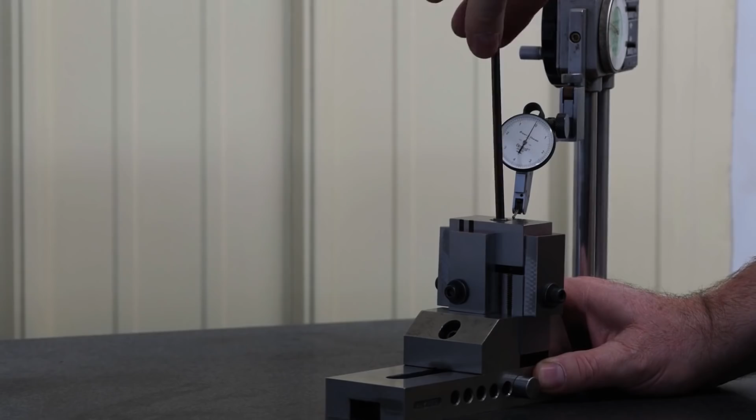Hello everyone. In this video I want to answer a lot of the questions that we've got from the previous video, and then talk about the visit we had with Uncle Murphy, who decided to bring his favorite cousin Bozo along. We'll discuss that a little bit as well.

There's been many questions asked in relation to the last video we did on this custom boring bar we're making for Keith Rucker. One of the main questions people are asking is, why aren't you using steel instead of carbide? Well, there's a couple answers for that.

One, we happen to have a piece of a broken carbide boring bar laying around, and Adam was kind enough to donate that. It would have probably just sat around, whether we would ever use it or not, I don't know.

But the more important reason we went with carbide was because on a steel boring bar or threading bar, the amount you can stick that bar out without problems is only about half of what you can with carbide. Now here are some of the boring bars that we make and sell right here.

This is a 3/8 bar, and this is a half-inch bar. These are made out of steel. With the steel bar, this being a half-inch diameter, the general rule is I can get about 4 times the stick out. So if I got a half-inch bar, I can get this sticking out about 2 inches, cutting in soft steel without too much problems.

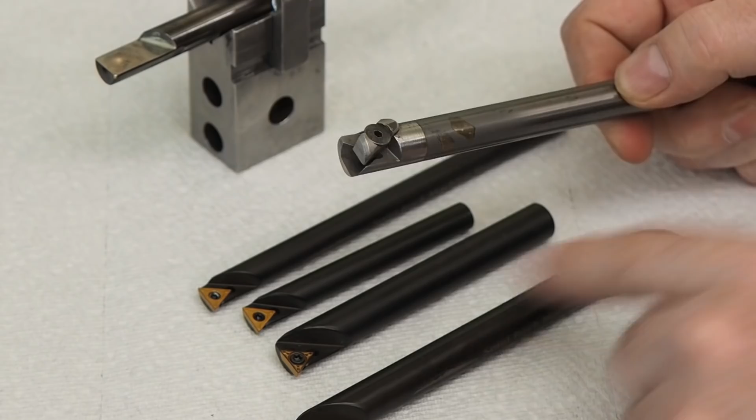So for getting the rigidity for the cut, we wanted to use carbide, because I've got to grind this diameter down to 450 thousandths. The nut that Keith has to make is 2.5 inches long, so we decided the bar, from the tip to the shoulder and the stick out he's going to have, would be 2.8 inches.

For a steel bar, that would surpass the 1.5 inch stick out you'd have with a 3/8 bar, and with a half-inch bar at 450 thousandths, a steel bar would also be surpassing it. But if it was carbide, it'd be well within that.

Plus, with a regular boring bar you're cutting with just a small tip. When you're cutting with that threading insert we have, there's a whole lot more surface that's cutting. So this is the main reason why we went with a carbide bar rather than a steel bar.

A lot of people are asking, why didn't you just take your carbide and silver solder, braze, or whatever, another piece of carbide on the end and shape it? Wouldn't that be a lot easier? Yeah, maybe - there's all kinds of ways.

People are talking about burning a slot, or actually cutting a slot in there. Well, I only have 2 diamond wheels, and there's no way I can get a slot in there. I do have some friends with wire burners, and that would actually be a good wire burn job. If you had the slot, I think that would work really good, and that'd probably be the strongest in the end, because you can have the bottom and the top.

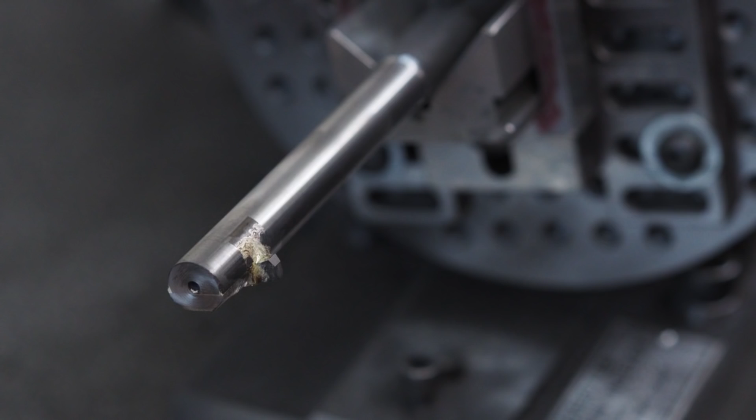That was my first mistake. What happened was when I had the tip silver soldered in there, and I pulled it out right now, Kathy will show a picture of that. I was going to grind relief on the heel side, on the relief side of the insert, and I wasn't paying attention, and I ground the cutting edge side, so I scrapped out that first insert.

As I did that, I'm looking at it and thinking something's not right. At my full-time job, I do use the lay-down inserts, but I haven't used them in a while, and we've been cutting threads — I think 10 thread per inch is about the coarsest we cut. Then we got 12, and we got inserts designed for that, and we never have a problem. I just slap the insert in and start cutting. I was thinking I'd have the same thing with all the geometry on this insert — that I could just silver solder it on there and take off cutting. And boy, was I wrong.

A couple of our YouTube subscribers pointed this out to me, and we'll talk about that in a minute.

But anyhow, what I have to do right now is get this from this flat. I have to cut this pocket, this meat over here. I got to cut at that 15 degrees, and with my 30 there, so we're running a compound angle.

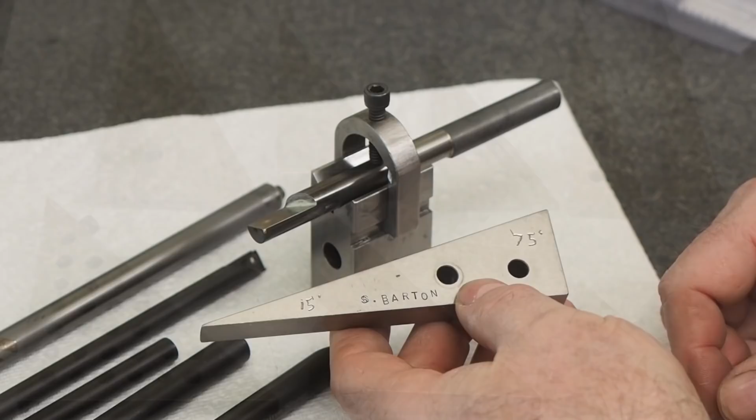That's where a lot of you people see the templates that I have. I brought a bunch of them home from work, and Kathy's going to show you a still picture. I can't have enough of these either — there's a lot of common angles that I use and work in.

So here's a 75 degree, here's 15 degree, here's 90 degree. It works out just right that these lay-down tools, at least the ones I use, have a 15 degree angle relief. So I'll set this up like so on some blocks, and then I'll be able to rotate that flat, and now I've got a real nice 15 degree established. It comes in good and handy for doing things like that, so when I grind that angle, it'll be good.

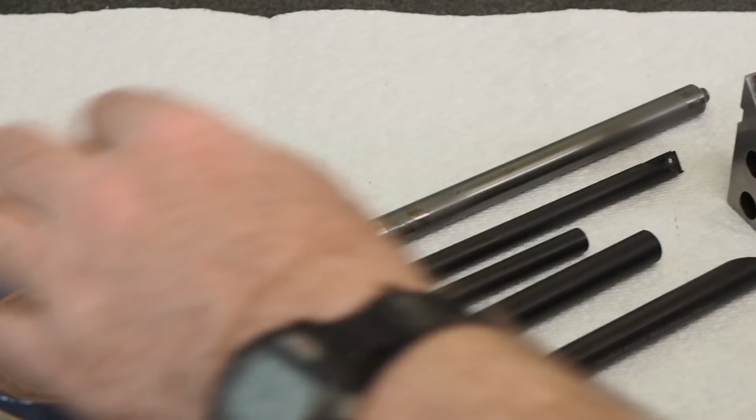There's a bigger problem that we have with grinding the relief for the helix, and I'll get to that in a minute. But the other issue I wanted to talk about was the silver solder — let me move some of this stuff around.

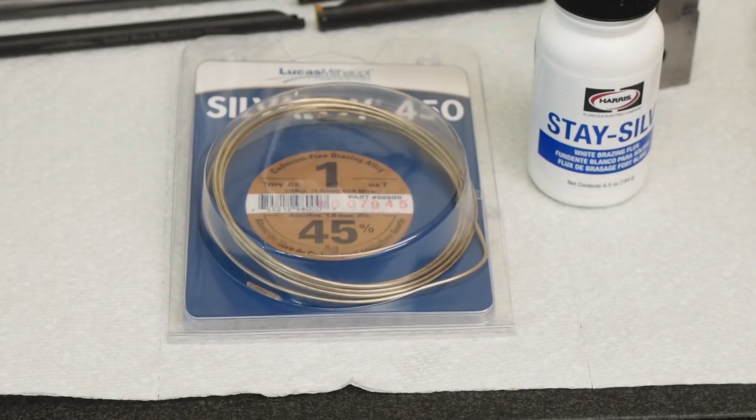And the flux that you use — there's a lot of controversy, you'll see it all over the internet. All my life I've been calling this silver solder, and even today, looking at the controversies and some of the comments made, I'm not sure if this is still considered silver solder or not. There seem to be a lot of differing opinions. All I know is this is the stuff I use.

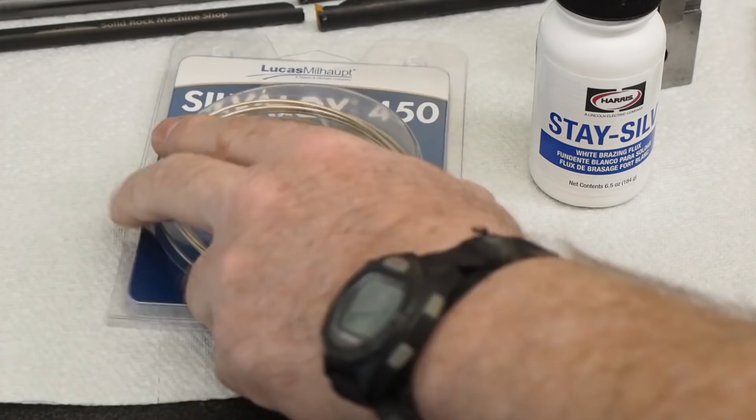Between the two pieces of carbide, that joint is really strong. Now what you've got to do is match — whether this is silver solder or silver braze, you have to match that with the flux you use. And the way you do that, if you come to the back side over here, it'll talk about this.

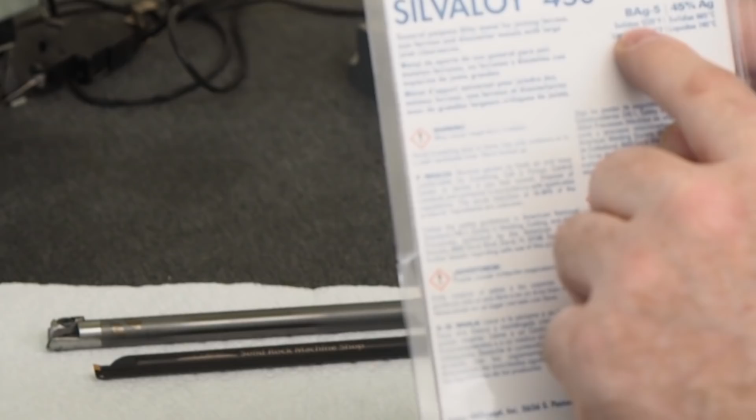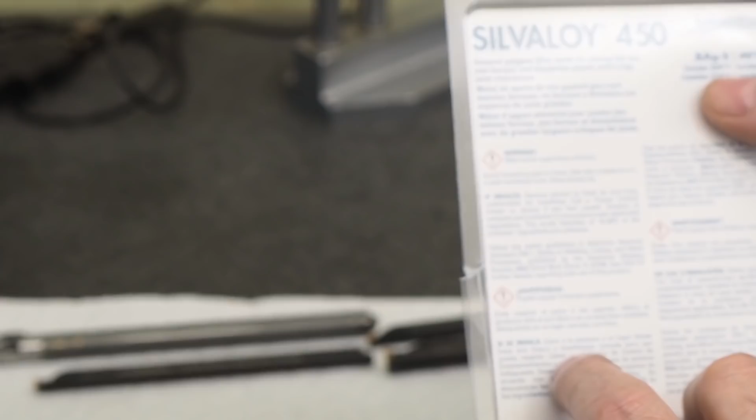Okay, it's at 1225 degrees — that's the temperature, I believe, the melting point of the silver solder. It becomes liquid at 1370. So it's much higher than the old soft silver solder or soft soldering that you probably generally use.

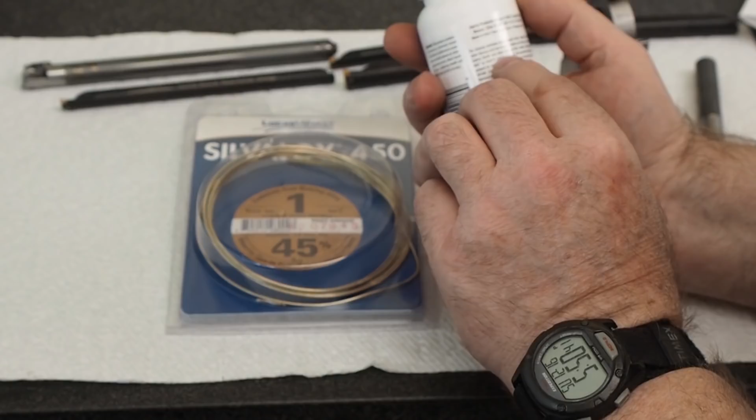So if I get some flux, I need to look over here, and I can read on the back it says it's chemically active from 1100 degrees to 1600 degrees Fahrenheit. So that's within the range here.

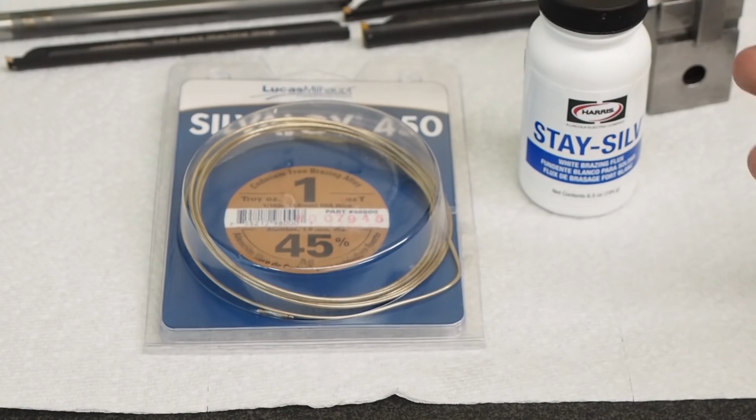That's within the range of the melting point there, and that's how you want to pick your flux. Now, one of the most common things I've seen on the internet is that if your melting point is above 800 degrees, they call it silver brazing. If it's below, they call it silver soldering at that point. I'm getting confused on that too, but there's a lot of controversy. The important part is that your flux matches what you use.

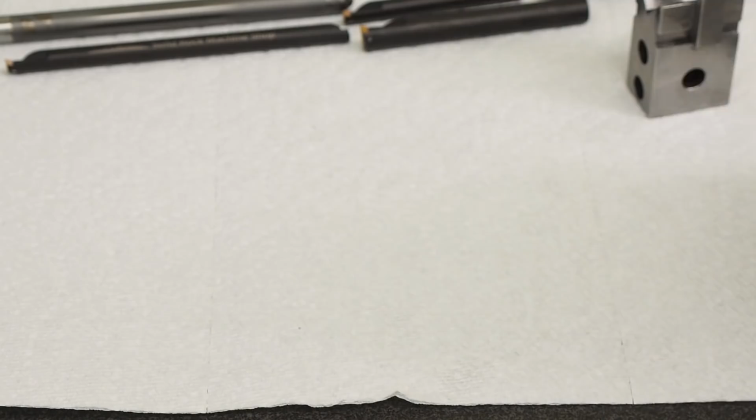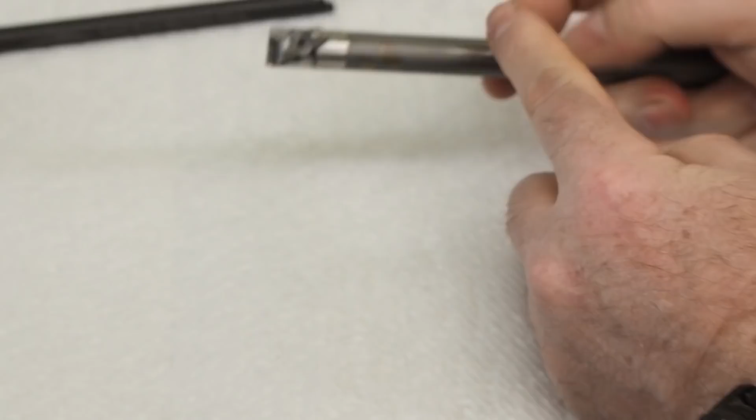This is what I use, and like I showed you, I've made these carbide boring bars. The reason I'm reluctant to make these - one thing I can do is cut the tips off and make a screw-on insert to go in there. I may do some bars for myself, but I'm reluctant to sell them because, one, the carbide's extremely expensive, and two, if you're in a small diameter hole cutting steel, you'll get a bird's nest in there, and a lot of times you won't even hear it. You're going in the hole, and all of a sudden you pull it out and the whole head is gone.

It's a bird's nest, and it puts so much pressure that it cracks it off. If you have a good silver solder joint - that's what I'm going to call this, not knowing if it's the correct term, but that's what I've called it all my life - here's one of those boring bar heads, 5/8 diameter. If you've got a good joint, you can see this entire carbide broke off and cracked down the side. It's still stuck and holding real good in there. It's very strong.

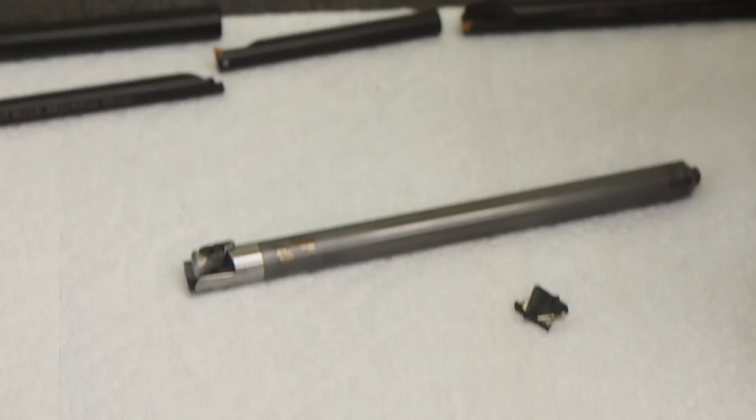Here's what I did with that silver solder: because when it's round it tends to roll, I'll heat this wire up and close it in the vise to flatten it out a little bit. Then you don't need a whole lot of it - you just take a cutter like this and clip off a little bit, put your flux on the carbide on both sides, and put that little tiny piece of silver solder in between. You heat it up with the torch, and when it gets to the melting point, it spreads out like liquid.

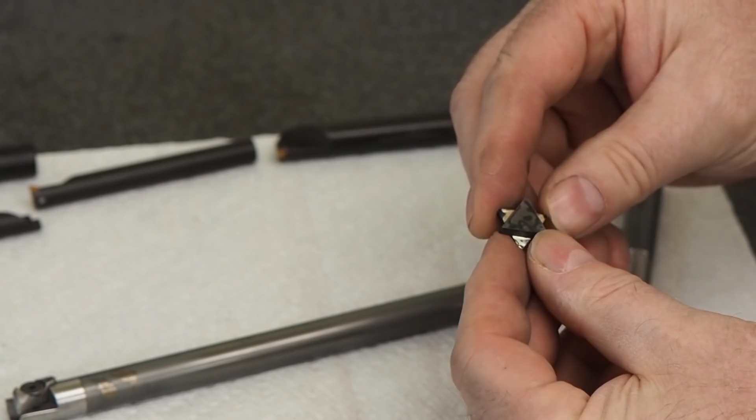It's funny, these are two used carbide inserts I was just practicing on, and I set them like that to begin with, but as soon as the silver solder melted, they would turn and line up to get all the surfaces together. It was almost like it was magnetic, so I had to get a screwdriver and hold it, turning it sideways to get it to stay in that pattern. I don't know if I can find a way to test this joint's strength, but maybe I'll figure something out. I bet that carbide would break before that joint would break.

So anyways, that's some of the comment section controversy over whether this is really silver solder, silver braze, or whatever. I don't know what the correct term is. All I know is this is what I use and this is what works. The important thing is just getting your flux and your filler material in the same temperature range.

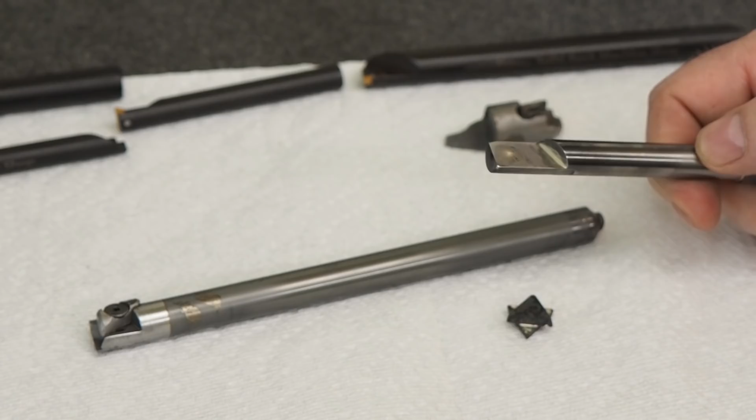The biggest issue that would have really been a mess is I didn't factor in the helix angle of the thread. It's a 4 thread per inch, and that's a very coarse thread - about the coarsest I've worked with is 10. We had two guys that helped me out with this: Lunky Dog, one of our subscribers, and Russ Kepler.

So I'm really appreciative of that.

So what I'm going to do is bring you over to the computer on Fusion 360, and I'm going to show you some of the details of this helix angle and the relief that has to be ground in the insert as a result.

Okay, this is just a rough drawing and rough concept. When it comes to Fusion 360, I love it, but doing some of this helical stuff and fancy drawing is kind of hard, a little beyond my experience. So basically what I did is I drew this. 875 is going to be our big diameter, 625 will be our small diameter.

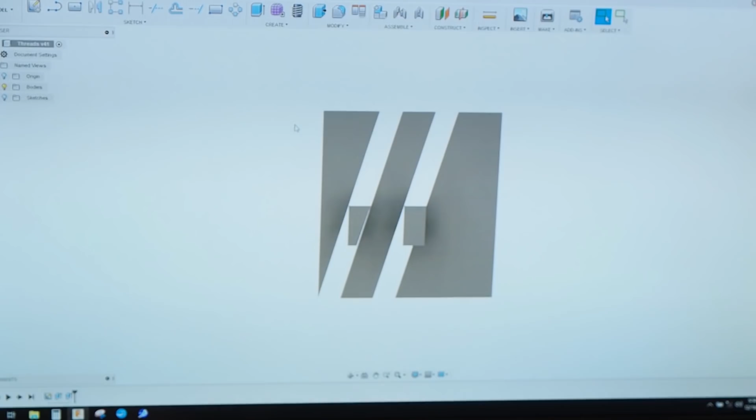So here's the insert unaltered. From here to here a quarter inch, from here to here a quarter inch. So we got a 4 thread per inch helix going on over here. And at 875 with a 4 thread per inch, we have an angle established right here.

If I use just a square tip, now the tip there had some angles, but I think it was very slight, I'd be surprised if it was more than 4 or 5 degrees. But anyhow, what would happen is if I tried to cut this without altering that insert, you can see there's a lot of interference right in this area. I would be rubbing with this non-cutting edge, and I would just break the tip off before we got in there. And if I could rub that off, the thread's not going to be even close.

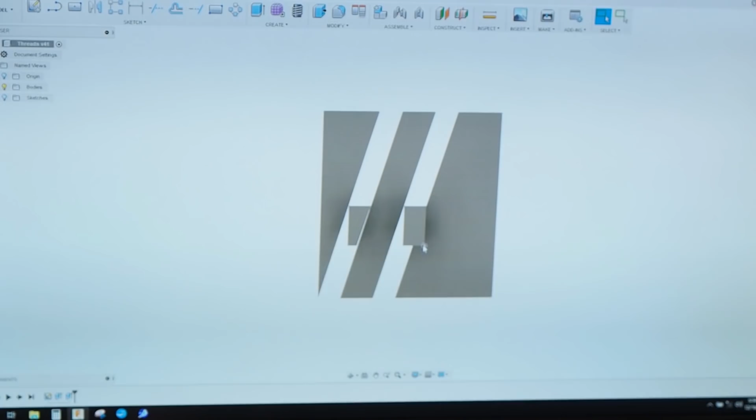So in this case, I would have to alter this relief on that tip like so. But you got to remember, this is at the big diameter, this is 875. If I drop down to where this is 5/8, and we have a quarter inch on those areas so that we have our thread per inch, look at how much more material's got to come out. Look at how much more interference. The angle has increased big time. And so the smaller I go, the more relief I have to have.

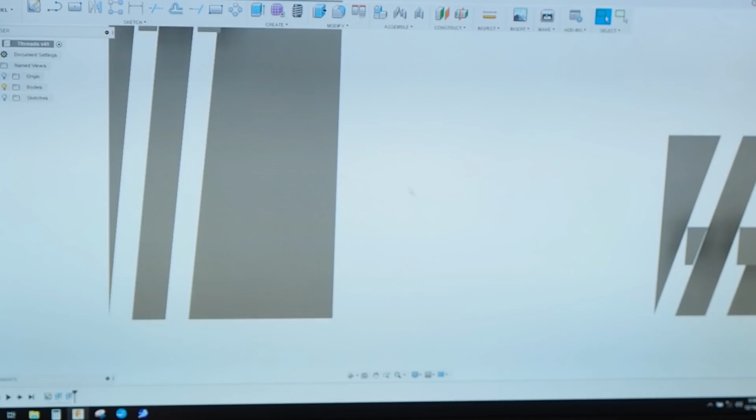And if I come back over here, I just drew one at 3 inches, where this is at 3 inches, and we have a quarter inch from here to here. And you can see the difference in the angle, very slight compared to that, and definitely very slight compared to that. So the smaller the diameter you go, the greater this helix angle becomes.

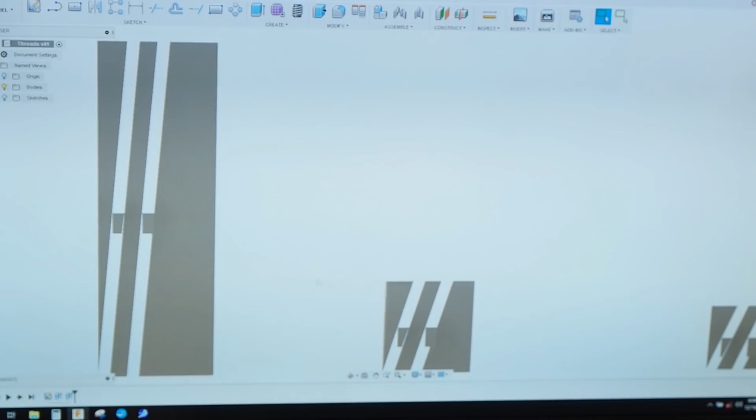And so that's why I believe this insert that we bought, one reason why the smallest one I can find was a 1/2 inch IC. Those are made for doing some large diameter work. And I'm going to just go in here and edit on the sketch so I can show you the actual dimensions so you can see.

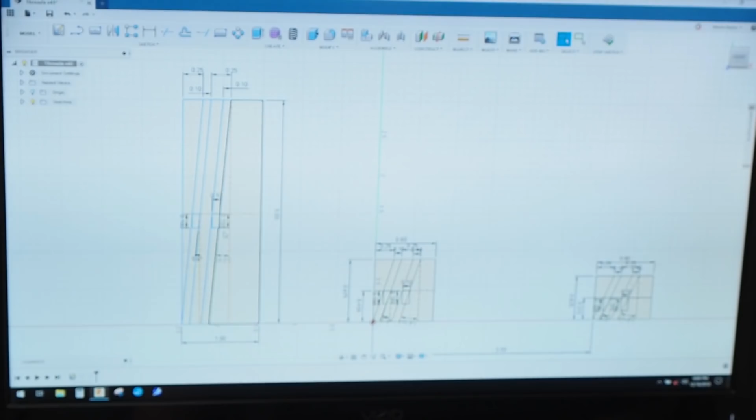So you can see I got from this tip to that tip a quarter inch. I got 100 thousandths in between. I got 3/16 on the tip. But look at a 3-inch diameter that you have, my clearance on this angle coming from this construction line, so this angle right here is 4.8 degrees. I'd have to go probably at least 5.8 degrees in my relief area, and that's if I'm doing a 3-inch.

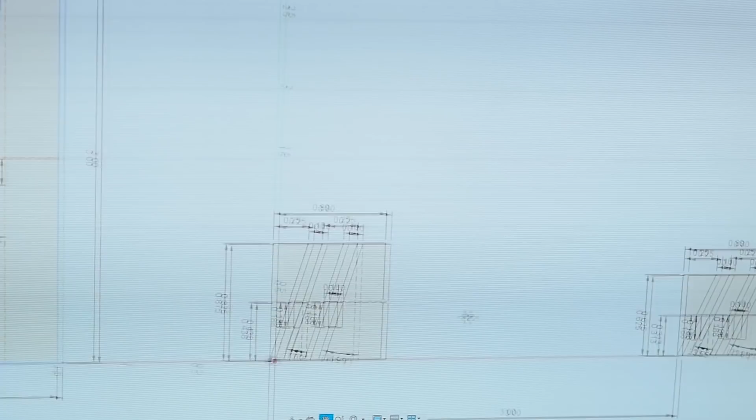If I come down over here and do the 875, well, look at how much. I went from 4.8 degrees to 15.9 is what I went to. I'd have to have about a 17-degree relief.

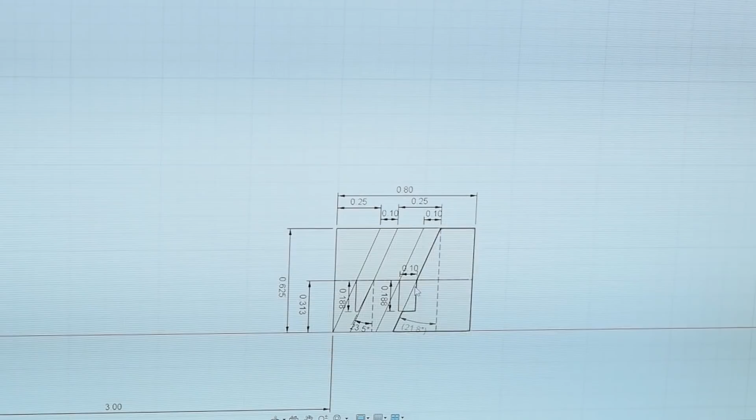When I come over here to the 5/8, look at how this angle has increased. Now it went from about 16 to almost 22, and I'm going to have to grind a relief angle in here, probably at least 23.5, so that I have no interference in there, and that it can cut through that.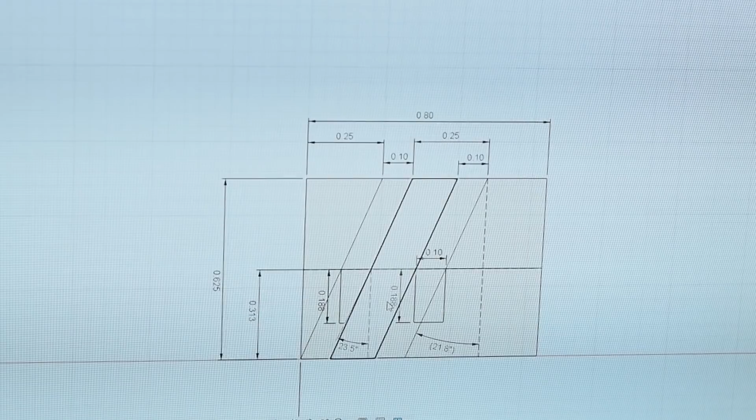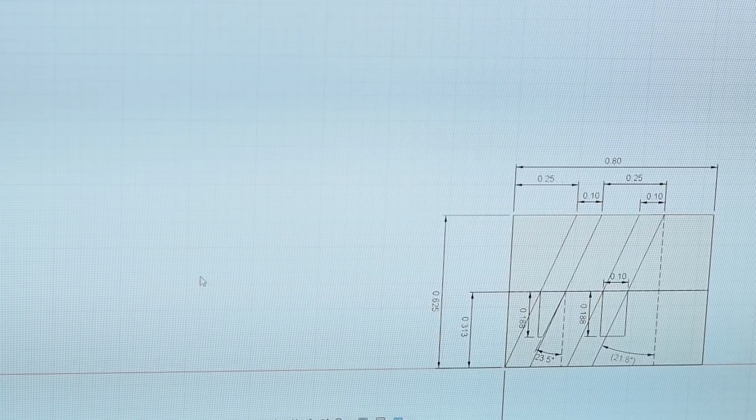And by the time you do that, you can see that this insert becomes weak. This area right here, if I remember right, was about 20 thousandths of an inch. You can see here the material that would have to be removed just to match that line. And so what happens is now we're going to have to remove that material at a compound angle.

So the difficulty of this job has just increased a lot, and we're going to have to get into some complex compound angle grinding just to show you what we're in for.

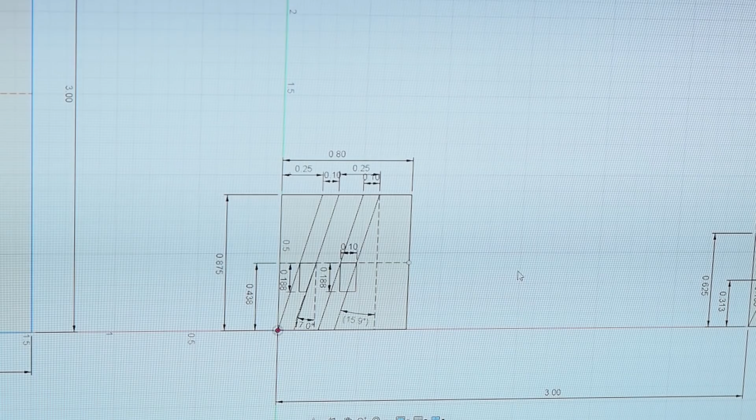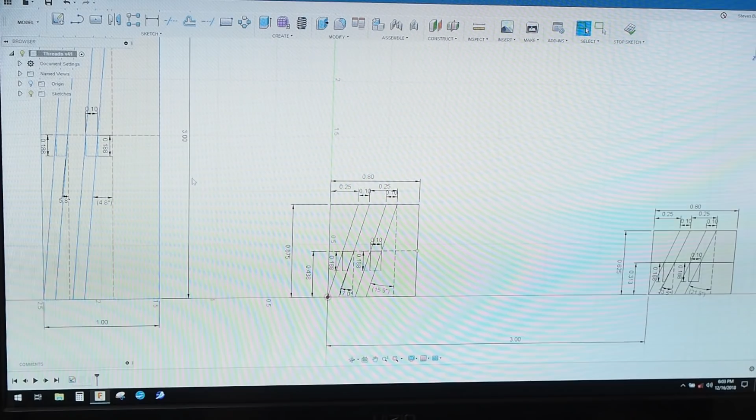In my history with the laydown inserts, all the geometry's correct, and you just pop it in there, you don't have to do anything else. But 10 threads per inch was the smallest I would have to go, and I've never had a problem. If my diameter was big enough, I could probably do the same with this Acme threading insert.

Now, the nice thing about it, because you got the relief angle over here, this is what I got to cut out and make relief for. But on this other side, I don't have to worry about it. That can be straight up and down. I don't need to worry about that material there, because this is all clearance already for it.

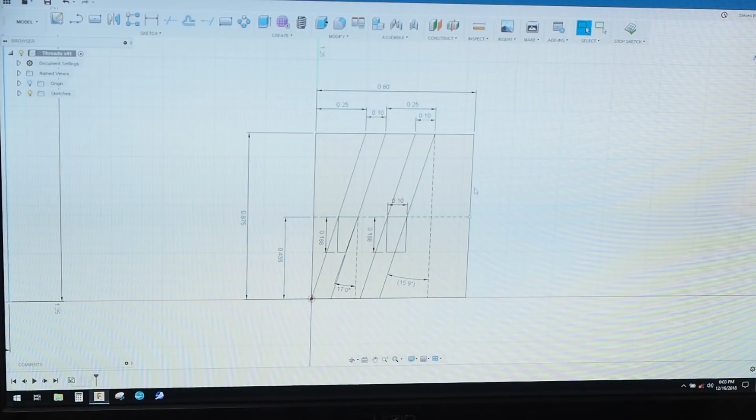One of the other questions I was asked was, well, why don't you do it a different way? There were many suggestions, many good, valid suggestions on why I would do it this way. One, I got into this thinking that with the design of the insert tip, I wouldn't have to mess with the geometry, and I was wrong on that.

But now my curiosity's got the better part of me. I need to go this direction just to see if I can do it and make it work. If I can't make it work, then I can turn around and we can explore some of the other alternatives. But I'm kind of built that way.

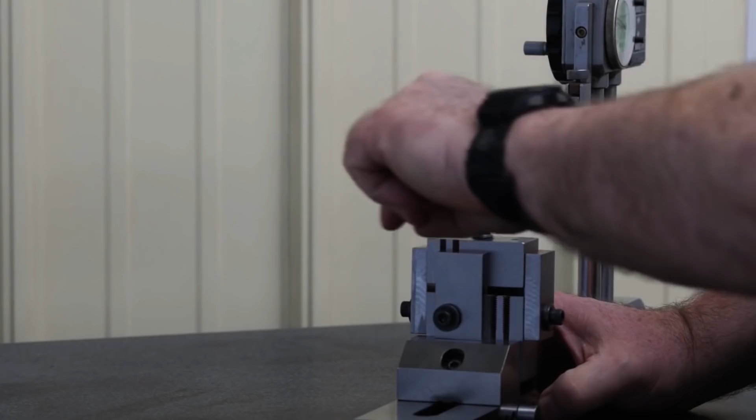There's a lot of things I want to see how they work, and we're going to show you some footage, some previous videos where I'm exploring some design concepts. Like when I saw Tom Lipton do a video on differential screws, I had never even heard of them, and I found that very fascinating. So I started making some of these differential screws and an adjusting instrument, so that I could get a very fine resolution adjustment.

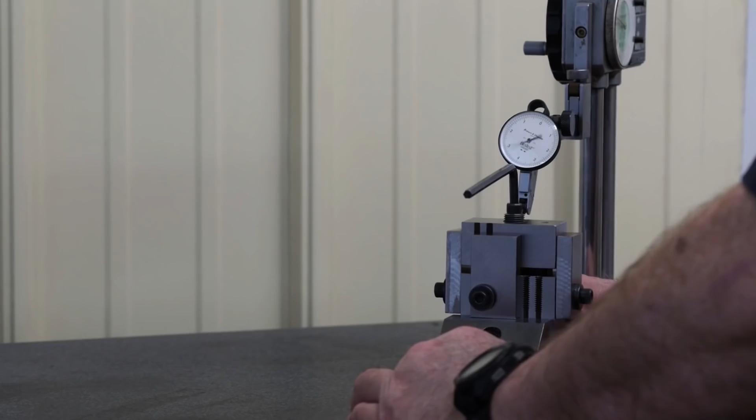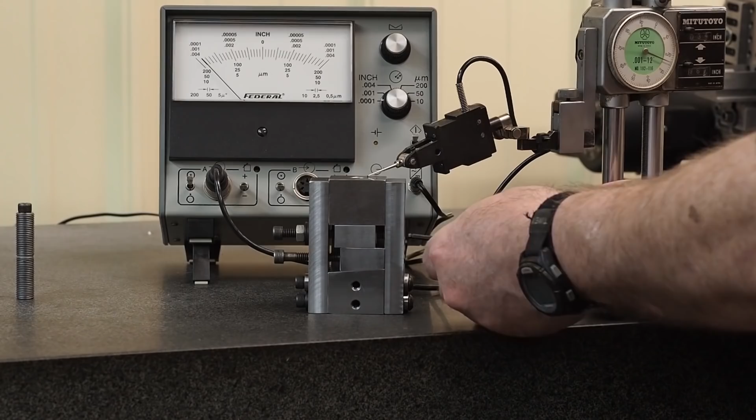In the meantime, I thought, hey, I could do another type of adjustment to get fine adjustment, a wedge adjustment. I don't know if they sell them, this is just something I thought would work, so I'd try it anyhow. I did not have any immediate use for it. I thought I would, but I shifted gears after talking with another YouTube friend.

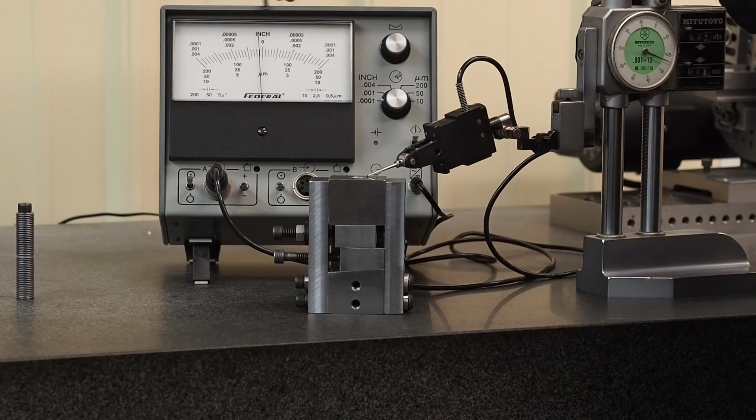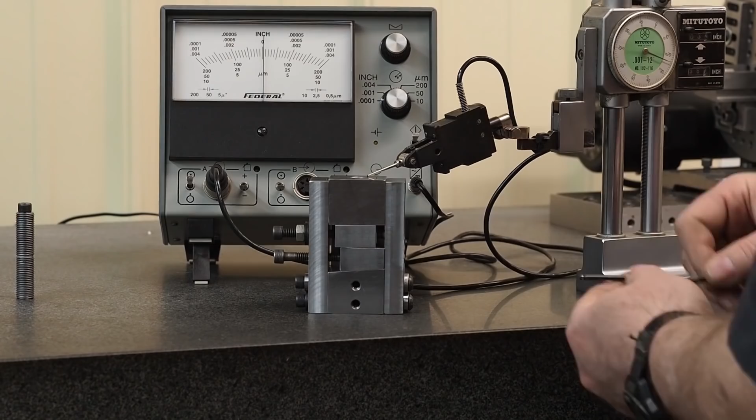I guess what I'm trying to say, I'm going to show you some footage. I make things sometimes without a direct purpose, just so I can learn from them. With that fine adjustment, the one with the wedge, I got the fine adjustment where I can take a 1/4 screw just off the shelf and use that as a push-pull mechanism for this wedge. The resolution I could achieve with that was beyond what my amp could even measure.

My amp, the finest resolution per mark, is 5 millionths of an inch. So we're going to show you some footage on that, because it's kind of buried in another video, and I think a lot of people haven't seen it. This thing is really neat. But I'm going to show you this footage because it shows you what kind of drives me.

Now I need to know. I know curiosity killed the cat, and sometimes that's a bad thing, but that's one of the things that drives me. I just need to know. So all the valid options you guys have suggested for doing this, we'll probably visit one of those if this doesn't work. But for now, I got to just try this, just see if it works. And that may be a big total failure, and it may be a success.

I don't know. The one thing is, it's not with Keith. We're doing this for him, so it's not like he's paying for it and he's going to come out at a loss on this. Any of the loss will be on me. But regardless, at this point, this is the direction I'll be going, just so I can see if it's possible and if it'll work.

By doing all these compound angles and the grinding and the relief of it, it's going to be a challenge as well as a learning experience. Maybe it'd be something that a lot of you guys can find a little bit of value in too. I know these are kind of things that help me with future projects, because I can use some of these concepts.

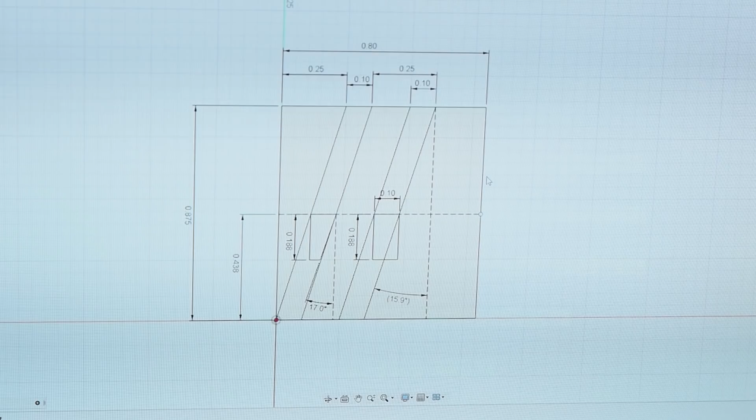Okay, this is the bottom of the bar. I got the flat on this side, and I already set my insert because it's going to have to be sticking out — the tip of it is going to have to be sticking out this way. So just for reference, I drew a blue line with the direction I got to set this up, so I have a good reference and don't grind the angle on backwards.

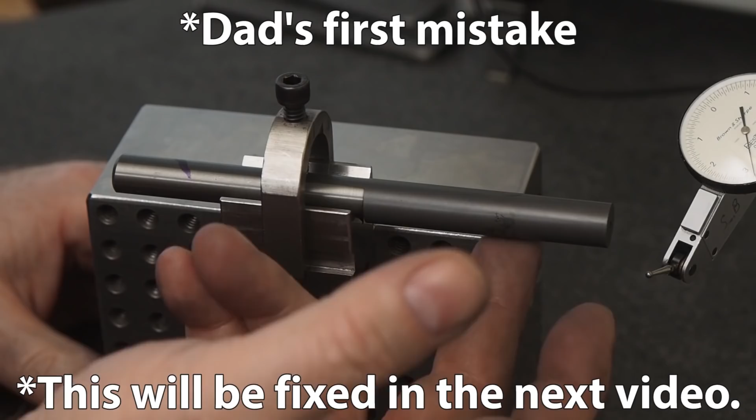But anyways, we got this flat, and I'm going to indicate this flat in. That way when Keith sets up, it'll be easy because this flat will be running parallel with this little notch we're cutting in here, so it gives them a nice reference source to work with.

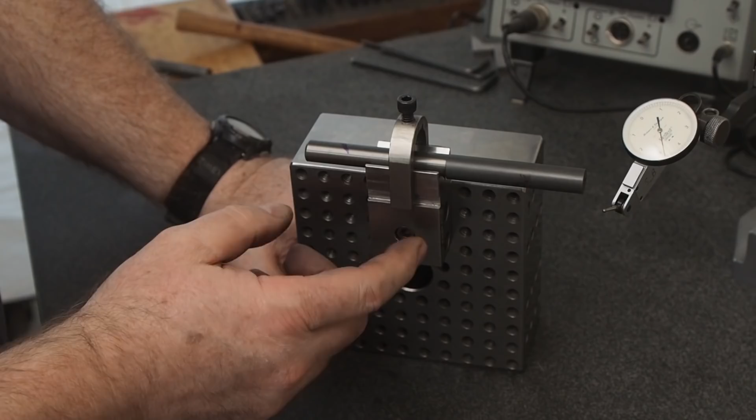Now, one of the nice things about these squaring blocks and your other tools — I always make my tools in the future with the idea that I'll probably be attaching a block over here. Here's how it's going to make some of this stuff easy. Because I have a flat going up here, I can take my 90-degree square and hold that up against this pin, loosen this up, get that oriented, and then snug that down a little bit, and that should line me up close, if not perfect.

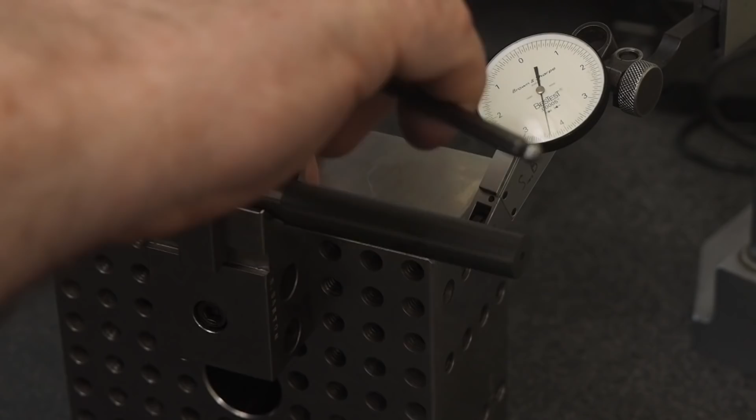Yeah, look how nice that lined up. So here you got a setup that could take a long time, but because all this stuff works together, it makes short work out of some of this setup. So I'm just going to snug that bar down a little bit more. Anytime you do that, you always want to recheck and make sure nothing moved.

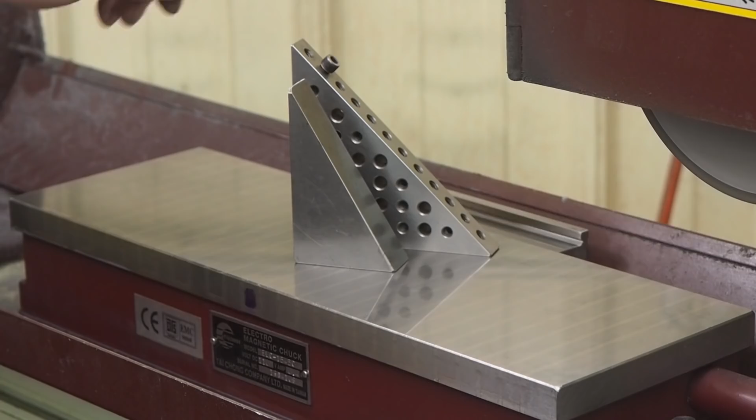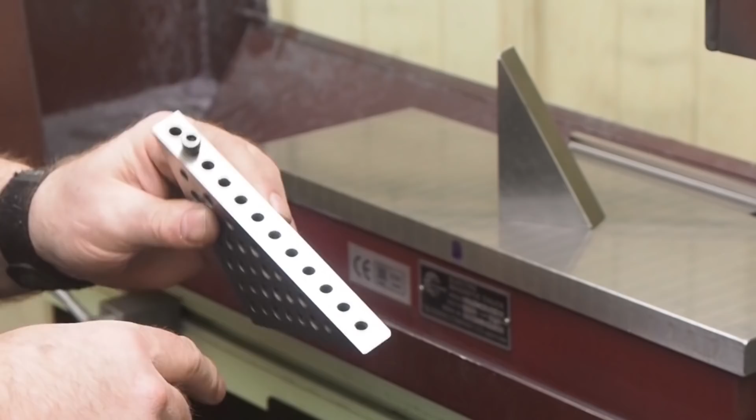We're looking good. One of the other things, if some of you guys are making your own tools, these things are so easy to make. This is 45 degree, and 90 — those are some very common angles. I got many of these, all different sizes with different hole patterns. I like to put holes in the front over here so I can put a screw in there, use it for stop work.

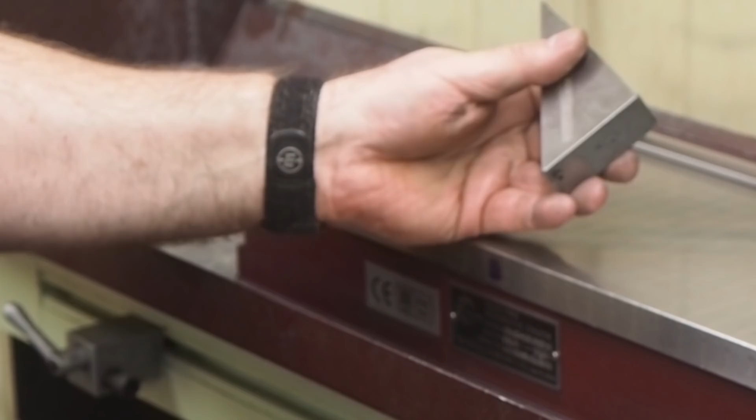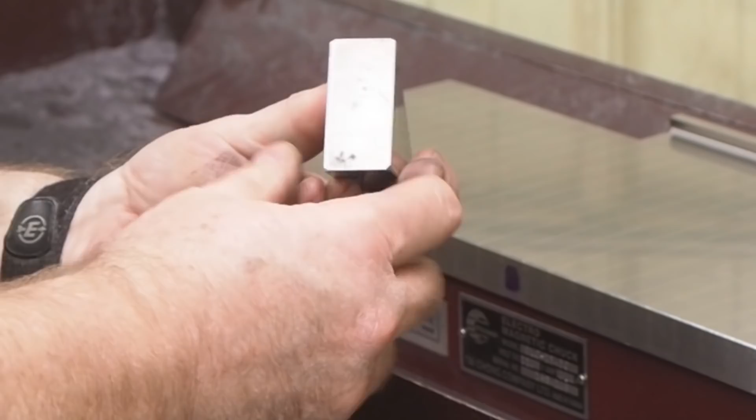Some of them, from the early days, have absolutely no holes in them. This one here is used very little. It's got maybe just a real light surface rust on some places. The angle and everything's still good and square, but there's no hole on it. But what we have, we've got a 90 here, we have a 60 here, and a 30 here — another set of good common angles.

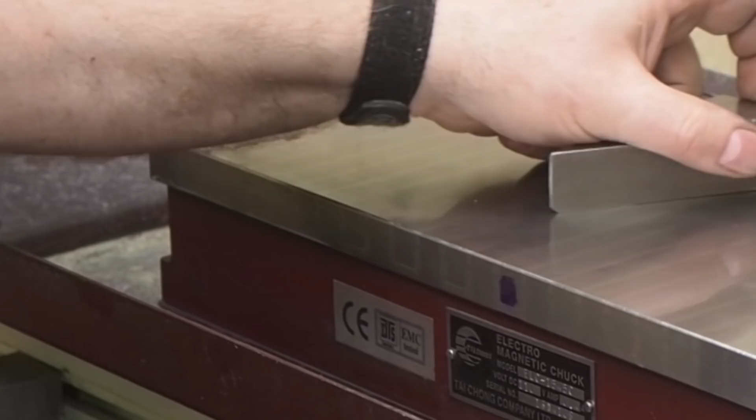Well, that insert that we have is going to be working — you got 3 sides in a triangle, so those would be 120 degrees for a whole circle. So when we're wanting to set this up off of that square, the way I got this set will actually establish the angle so it'll be right in the proper direction.

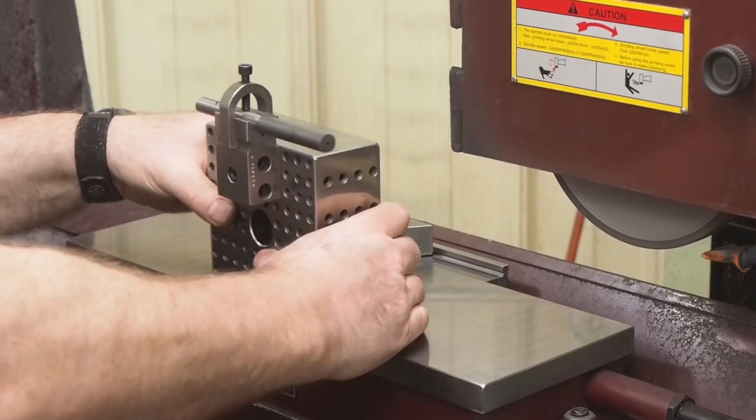Actually, I think I'm going to set it this way. Actually I'm going to have to set it this way, otherwise my guard might not come down low enough on the arm. I would have rather grind it this way so you can see better what's going on, but it looks like I'm going to have to do it in this direction.

So what I can do is get this surface established, and then get this surface established, get that mounted about right where I want. In this case, because this block is A2, it is magnetic, but not as good as O1 and whatever. I'm going to leave this cold roll block here as a backing just so it doesn't spin — I think I would have been okay without it.

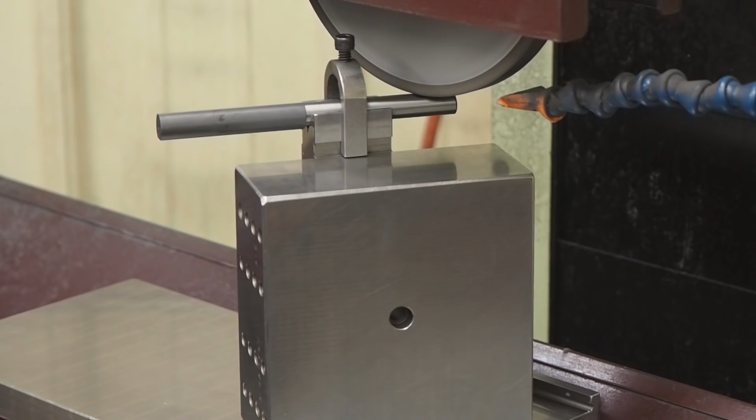But now we have this set up so that when I cut this pocket, I'm at the proper angle in regards to the insert. So if my numbers are right, I've touched off on here, and I got to go 194 thousandths deep. I'll just go maybe 190 to begin with, then step over and take that other piece out, and we'll go from there. I'm going to end up using coolant, so my cube is going to get full of coolant, but that's fine — I'm going to need it when I'm grinding this carbide.

One thing you have to be careful about is the carbide will not handle thermal shock very well. It would be best if I could have my coolant directed where it's always on the carbide. I could have roughed that out a lot faster, but since I was grinding without the coolant on and coming back in, I just eased it down there. It took me longer, but this wheel is cutting so free that very little heat was going in, and then it'd come under the coolant, so there was hardly any thermal shock.

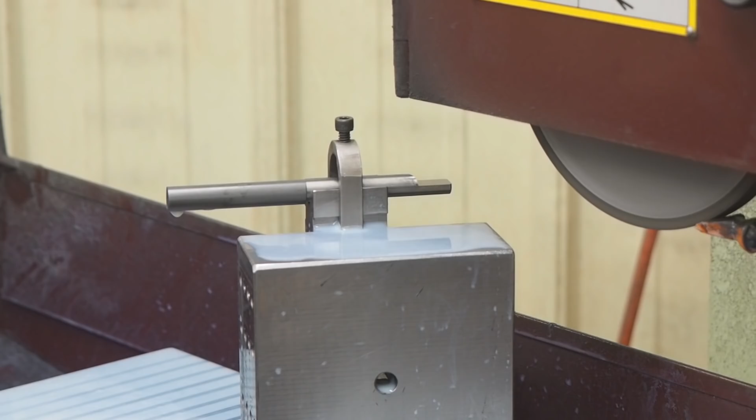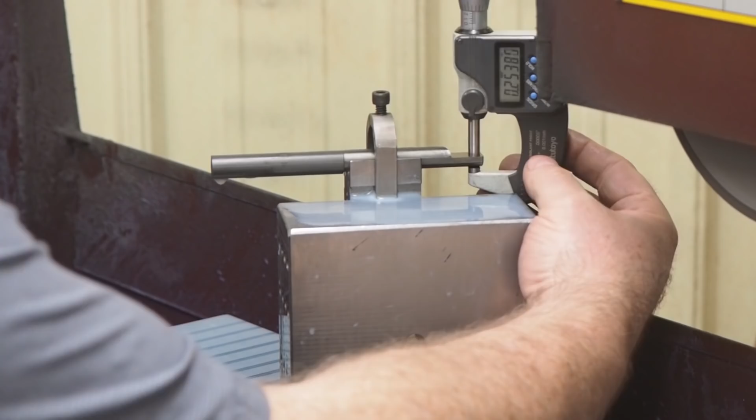That should be it. At 256, if my math is right, that would put that tip at center line. I want that to ride above center line by about 2 thousandths, so I went for 254. So we're at 253 and 7 - yeah, 253 and 7, and again it might be because of the lack of flatness of the wheel by now, but we're about 253.7, 253.9, and that will be good.

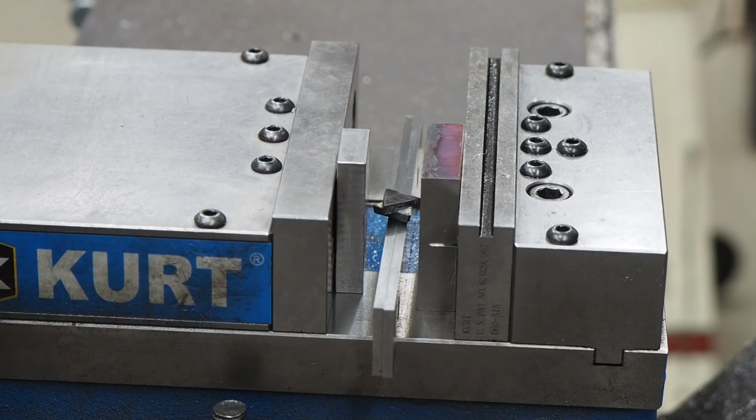Okay, I just thought of a way that may work. I want to test the strength of this solder joint over here, and what I have is the point of the top insert hitting on this soft steel, and the point of the bottom insert hitting this soft steel. I'm going to apply pressure. I'm going to guess that that tip is going to be breaking way before the solder joint comes out. Now obviously I didn't want to do this with my hard jaws because I'm going to mess them up, so I got some scrap steel over here that I can work with. So let's see what happens.

I got a lot of pressure on there, and something finally - well, you can see it's still joined together, and what happened, it spun out and embedded in there. But like I say, I put a lot of pressure on there, and it still did not move, and there's no way that the pressure on this boring bar is going to even have one tenth of the pressure I just applied over here. And you can see that stuff has just got a super good joint. If it's done right, it's strong, it's powerful.